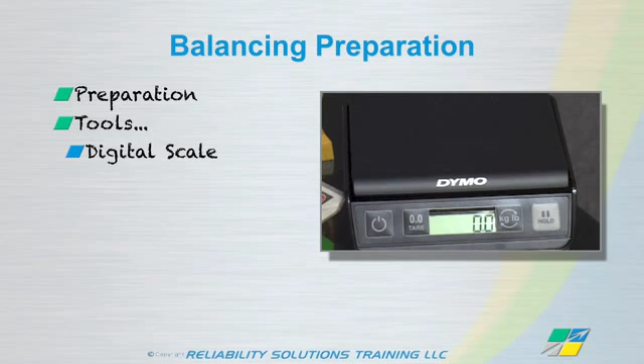This episode is about achieving precision balance results in the field. As with most tasks, preparation is the key to successful field balancing. Make sure you have the correct tools for the job. This includes an accurate digital scale, ideally with both grams and ounce scales, trial weights or clips. This is an example of a kit that our service guys use, and these kits are readily available from various different sources.

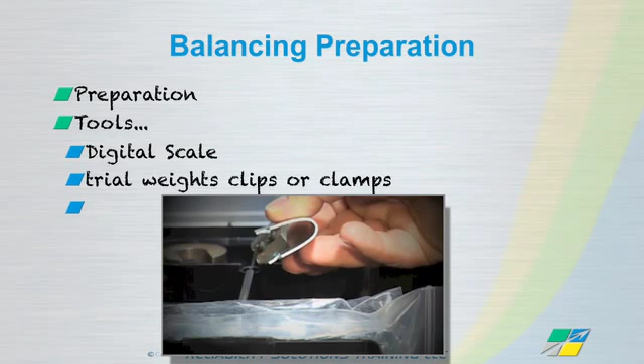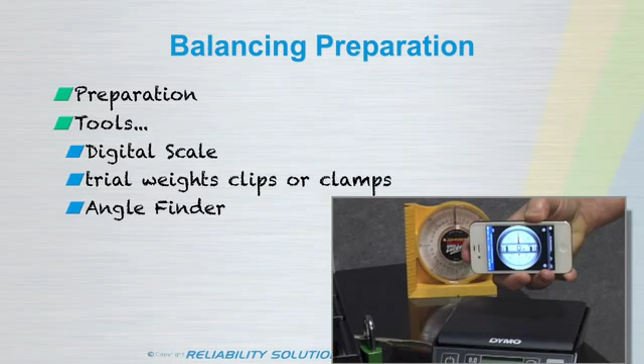An angle finder is a must. Nowadays, many of the smartphones have good clinometer applications which can be used here, provided we can find a way to attach it to the shaft. Of course, we also need a data collector and a photocell, and then a selection of wrenches, tape measure, and various hand tools and metal markers to mark weight positions. A flashlight and a strobe light are also good tools to have along as well.

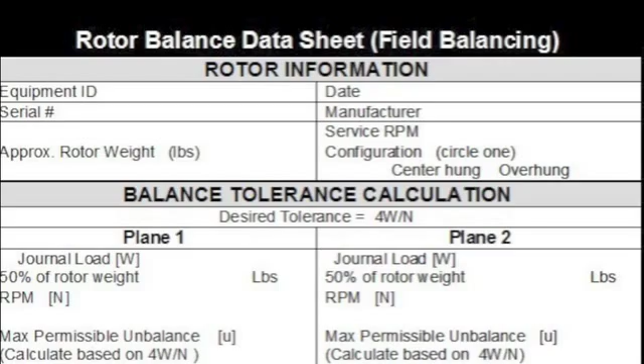You're going to need certain information to be able to determine if you have reached a precision balance standard. At a minimum, the information needed is the weight of the rotor, the service speed, and the radius at which you are adding and removing weights. It's also useful to know the position of the center of gravity relative to the location of the bearings.

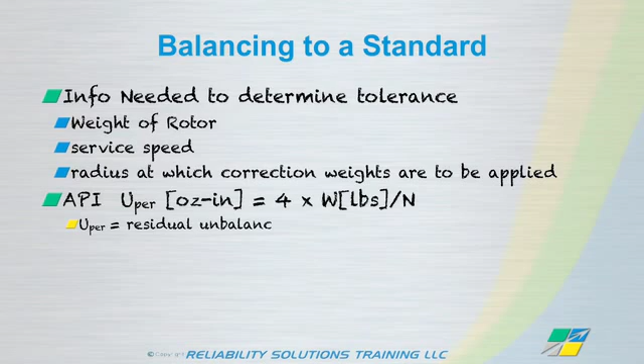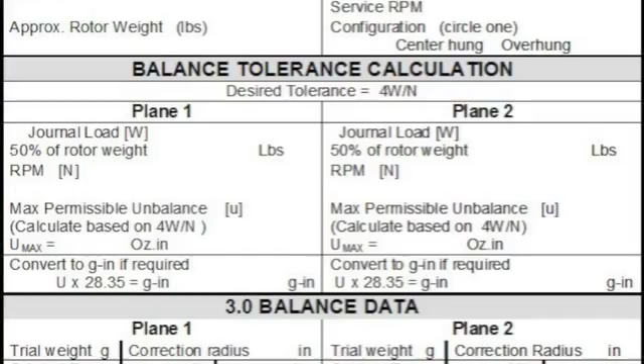We always recommend balancing to a precision standard such as the API standard or an ISO G1, which are both very similar to each other. Personally, I like to use the API system because the calculations are simple. The maximum unbalance per plane, U_per, should be 4 multiplied by the static journal load in pounds, which is 50% of the rotor weight for symmetrical rotors, divided by the service speed: 4W/N. This will give you an answer in ounce inches.

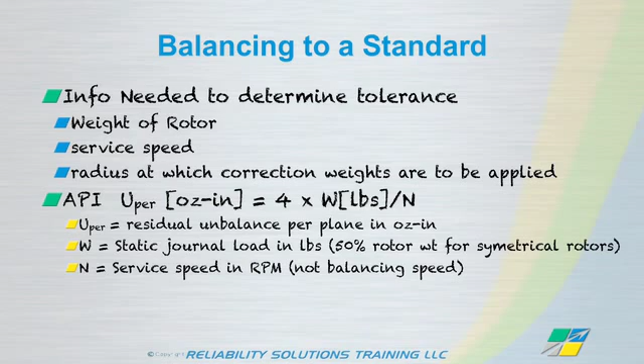Once we have this information in hand, we're now ready to start balancing. The balancing procedure is basically the same for all of the different instruments. We do an original run, noting the amplitude and phase in both planes. We then apply a trial weight to the left-hand plane and redo the run. We then remove that weight and apply it to the right-hand plane and then redo the run. And then at the end of that, the instrument will give us corrections in both planes.

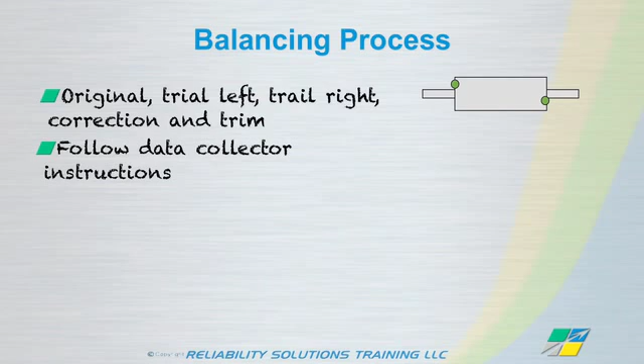After applying the correction weights, we will then do another run and validate the readings and see if we need to trim. The data collectors really step you through this process. All we have to do is follow the instructions. When selecting how much trial weight to apply, we're looking to see a 30-degree phase shift or a 30% change in vibration amplitude as a result of the trial weight. Most modern balancing programs have trial weight calculators built into them, and while the numbers produced tend to be a little conservative, we strongly recommend they are used until the technicians get a little more experience under their belt.

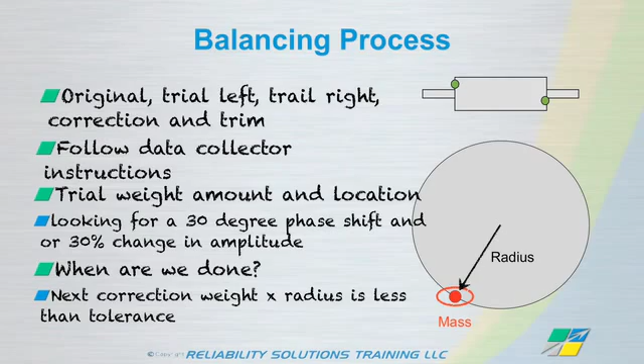We should keep balancing until such times as the trim correction weight suggested by the instrument, when multiplied by the radius at which we are applying that weight, does not exceed the tolerance value previously calculated. At that point, the rotor has achieved the appropriate balance standard. Well, there you have it. Achieving precision balance results in the field. With these modern data collectors, it's actually pretty easy to get great results.